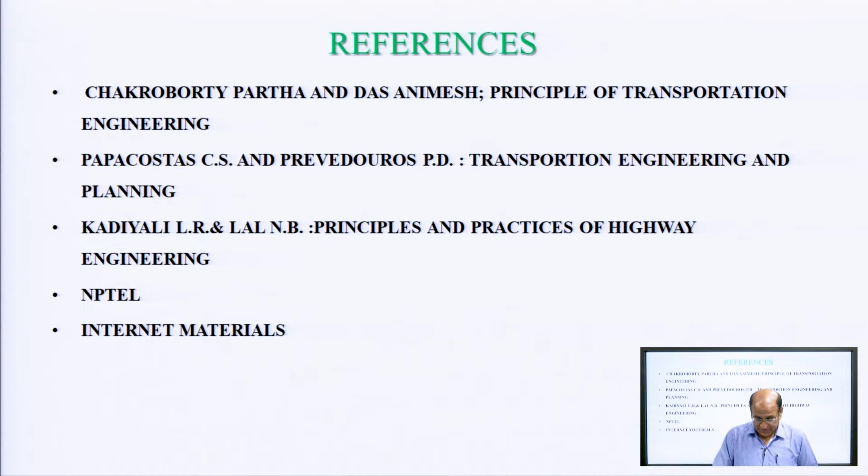The content that we will cover today are urban growth, private vehicles and pollution, land use, urban density, travel pattern, right of way, parking policy, mobility, urban mobility with smart city technology, smart traffic system, future of urban mobility, upgradation of urban mobility, policies and standards, and designs for urban mobility.

So first of all, urban growth. One of the biggest problems of urban transport has been its inability to keep pace with population growth in the city. While urbanization and growth of the city contribute to economic growth of a city, unplanned growth cannot be sustained in the longer term.

A city that is planned from the beginning for more population, infrastructure and public transport is better equipped to tackle growth. All cities will witness economic growth, but an unplanned city will stagnate due to deterioration of quality of life, while the planned city will continue its progress. In India, many cities fall under the first category, where growth is haphazard because of ad hoc policies.

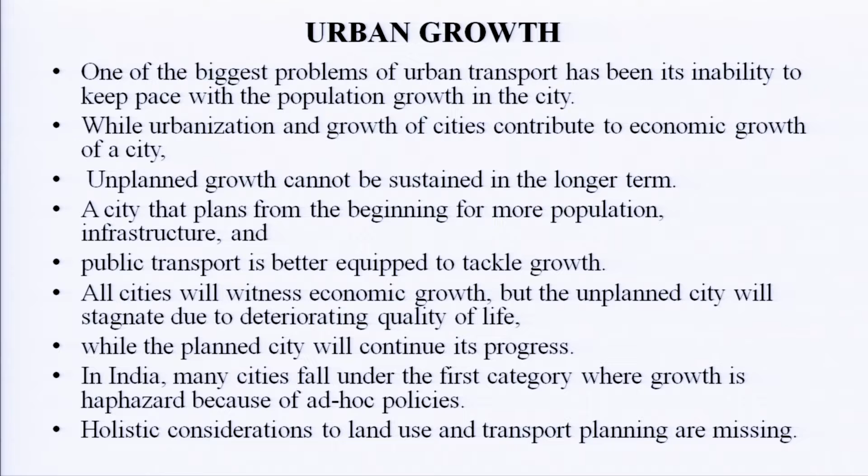Holistic consideration to land use and transport planning are missing. Private vehicles and pollution is a big problem for our country. More and more people opt for their own vehicle. The rise in income level, easy availability of loans and the status afforded by owning a vehicle has led to tremendous growth in private vehicles.

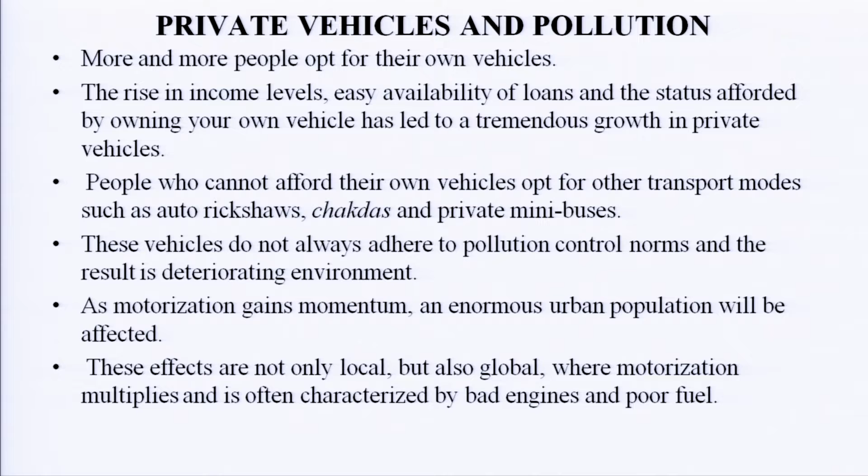People who cannot afford their own vehicles opt for other transport modes such as rickshaw, chakdas and private minibus, etc. These vehicles do not always adhere to pollution control norms and result in deteriorating environment. As motorization gains momentum, an enormous urban population will be affected. These effects are not only local, but also global, where the motorization multiplies and is often characterized by bad engines and poor fuel.

Pollution associated with transportation is not only from the growth in the number of vehicles, but also from urban sprawl. Dirty fuel, poor traffic management and high proportion of smoke-belching vehicles such as old and ill-maintained buses, auto rickshaw and two-stroke motorcycles.

In India, development plans and transport plans are taken up as independent exercises. The transportation plan depends more on data than strategy, and tends to accept the development plan as sacrosanct. Generally, they do not make recommendations on improving the development plan and are undertaken as a study meant to reinforce and promote pre-conceived ideas like road widening, grade separator, LRT and metro.

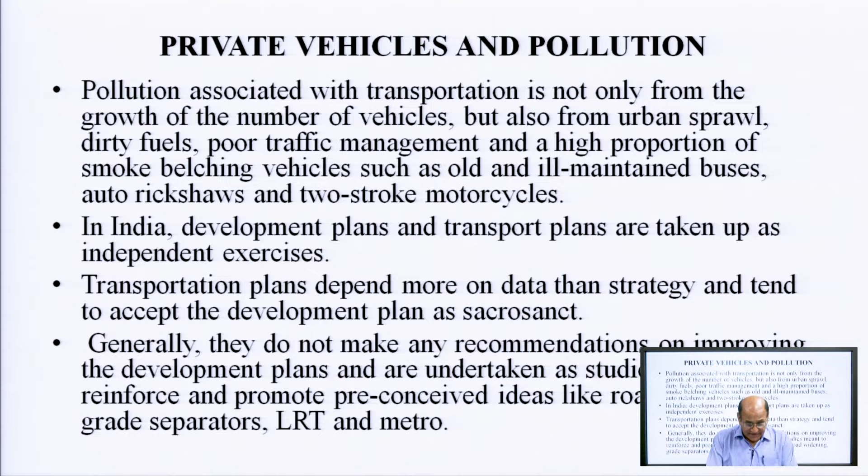Land use is a very important aspect of urban transportation system. We will discuss it separately also, but here we will cover it slightly. In urban transportation system, there is a fundamental relationship between land use, demography and transportation. Where people live and work, go to school or shop, decides the exchange of trips between different areas and roads. Socio-economic, cultural and demographic factors like employment and family income influence the number of trips and how they are made.

The urban transport system affects the accessibility of land and its value, and therefore urban transport is a tool to shape urban development and urban form. Ideally, land use planning and transportation planning should go hand in hand. When this is not done, fundamental flaws are built into the city's structure.

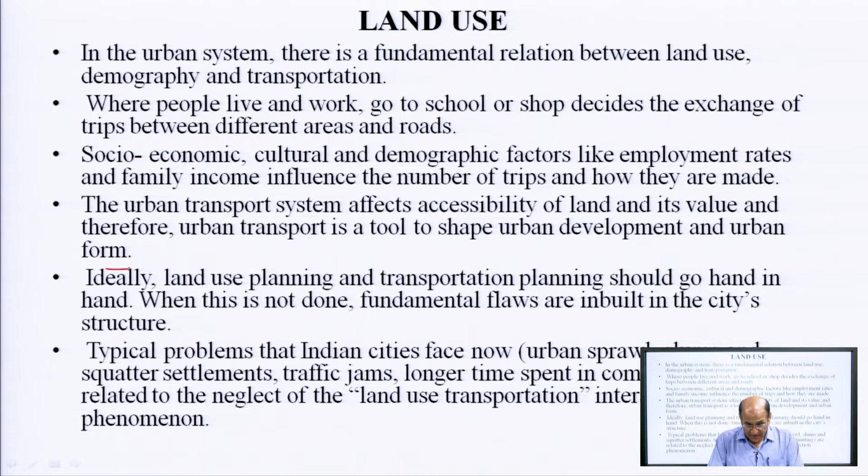Typical problems that Indian cities face now: urban sprawl, slums and squatter settlements, traffic jams, longer time spent in commuting, are related to the neglect of the land use transportation interaction phenomena.

Most cities that do well with regard to transportation and land use planning tend to be otherwise well managed, which includes being fiscally and financially sound. Cities that neglect this reality face fiscal and financial difficulties, and generally bear heavy environmental cost, and also the issue of social equity in transportation remains unaddressed.

The disciplines of urban transport, urban geography, urban economy, city planning and environmental study have long recognized the land use impact of transportation decisions. For example, when the planner considers widening of a road or raising the minimum parking standard, they are generally focused on direct financial cost and give little consideration to factors such as social and environmental impact of increased pavement.

Yet these land use impacts can be comparable in magnitude to other costs and benefits that are normally considered in transportation decision making.

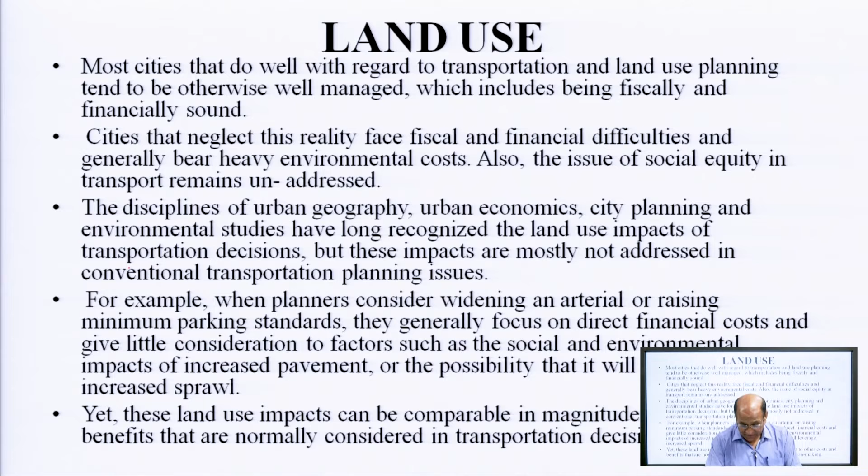Now, with the city having such scattered land use, density gets affected. The ideal city form we are looking for is higher density at the core, at nodes, and along the transport corridor - nodes, core and corridor.

With density gradually receding away from the center or the node and away from the corridor, these dense city cores, nodes and corridors may be in the form of a central business district with the land use mix that is appropriate for local context.

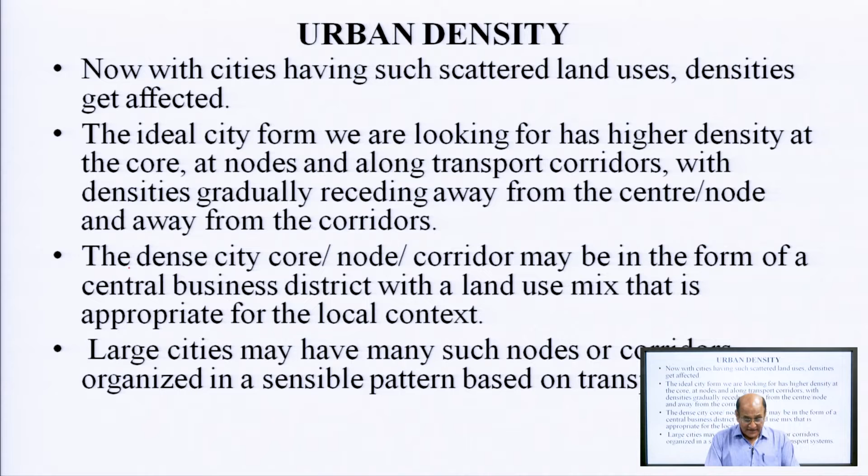Large cities may have many such nodes or corridors organized in a sensible pattern based on the transportation system.

Now come to the travel pattern. Uncoordinated land use and density pattern always result in a skewed travel pattern. In such a scenario, it is not unusual to find office buildings scattered over the city, mixed with other land use.

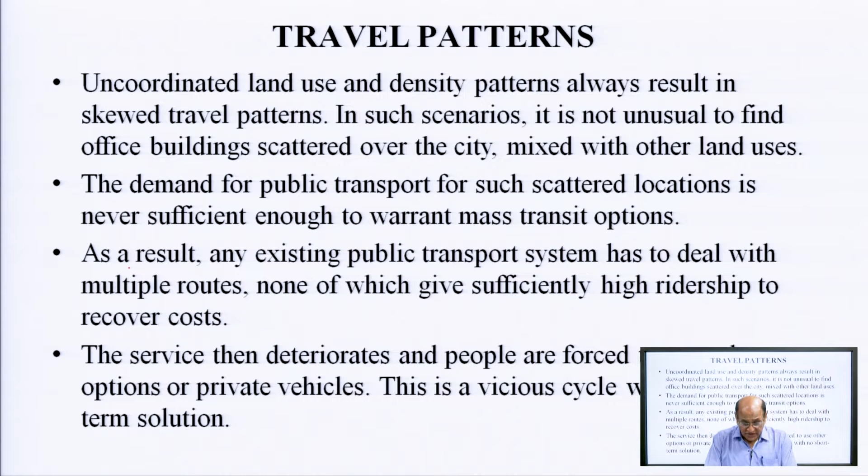The demand for public transport for such a scattered location is never sufficient enough to warrant a mass transit option. As a result, any existing public transport system has to deal with multiple routes, none of which give sufficiently high ridership to recover cost. The service deteriorates and people are forced to use other modes of option or private vehicles. This is the vicious cycle with no short term solution.

Road patterns are important. They constitute almost 20% of the city land area and are the most important public open space for the city.

Roads define the city structure and influence its spatial growth, determine infrastructure network, and influence the efficiency and productivity of all sections of society. Planning and design of a road network is necessary for ensuring a smooth and efficient flow of traffic.

Safety of the road user, lowering of air and noise pollution, facilitating efficient planning of infrastructure network, increasing the efficiency of the labor market, supporting efficient and economical public transportation system, facilitating more efficient economic construction and maintenance of a street.

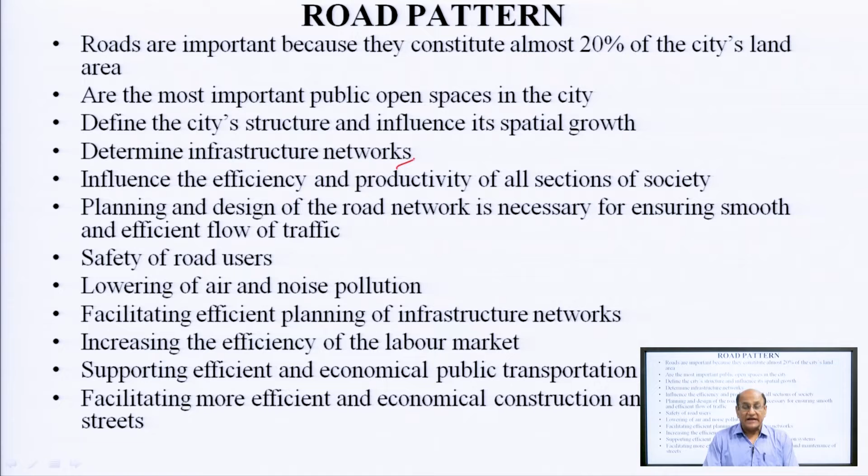Right of way. Another common problem in Indian cities is underutilization of right of way, ROW. A ROW is the width of road including footpath, pedestrian services, cycle track, infrastructure and traffic lanes.

Essentially, it is the width of the road from the property boundary on one side to the property boundary on the other side. In India, our concept of road is the tarred portion of the road.

What remains between the asphalt and the property boundary is free-for-all zone, encroached upon by myriad activities like parking, bus stops and hawkers. As a result, pedestrians are forced to walk on the tarred portion, leading to high probability of accidents.

Since ROW is not organized as per requirement of the transport and non-transport function, most Indian streets are characterized by chaotic and unsafe situations for all users. It appears that roads are treated as a leftover space between the buildings.

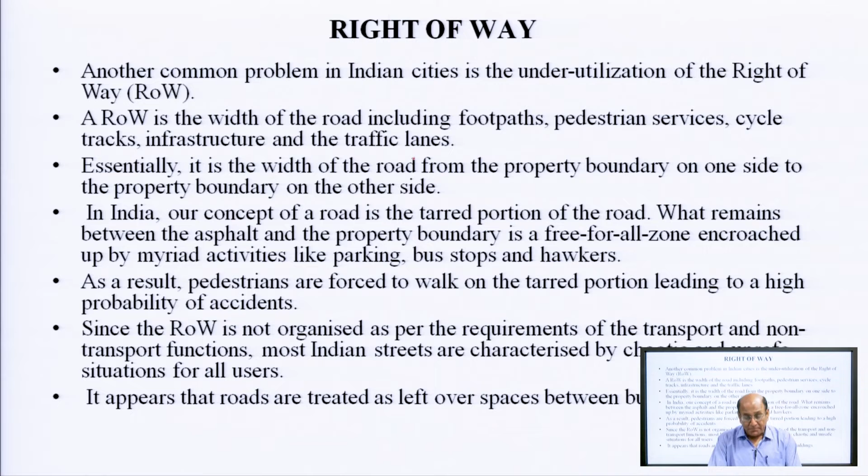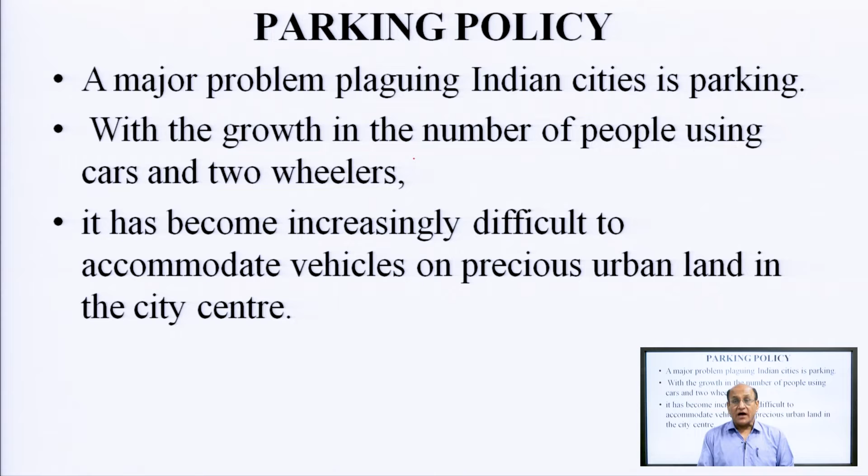Parking policy. A major problem plaguing Indian cities is parking. With the growth in the number of people using cars and two-wheelers, it has become increasingly difficult to accommodate vehicles on the precious urban land in the city center.

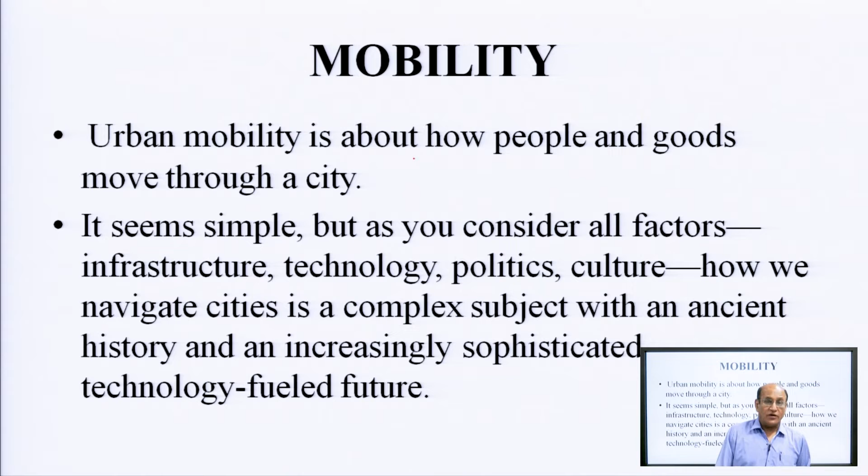Now come to mobility. Urban mobility is about how people and goods move through a city. It seems simple, but as you consider all the factors, infrastructure, technology, politics, culture, how we navigate cities is a complex subject with an ancient history and an increasingly sophisticated technology fueled future.

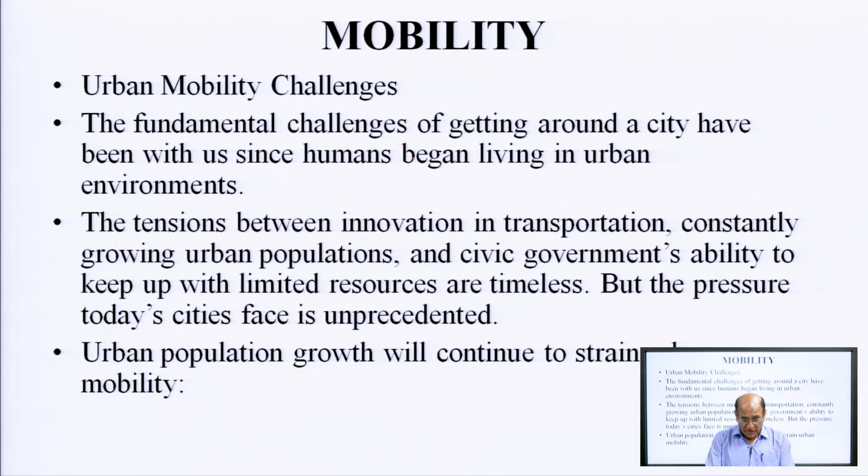Urban mobility challenges. The fundamental challenges of getting around a city have been with us since humans began living in urban environments. The tension between innovation in transportation, constantly growing urban population, and the civic government's ability to keep up with limited resources is timeless, but the pressure today's cities face is unprecedented. Urban population growth will continue to strain urban mobility.

Now come to another factor which affects mobility, that is congestion. Time spent sitting in traffic is a major drain for individual commuters and the overall productivity of world cities. Congested roadways do more than waste time.

Public safety. Traffic accidents kill 1.35 million people around the world each year, and leave between 20 and 50 million people with non-fatal injuries. More than half of all road traffic deaths and injuries involve pedestrians, cyclists, motorcyclists and passengers.

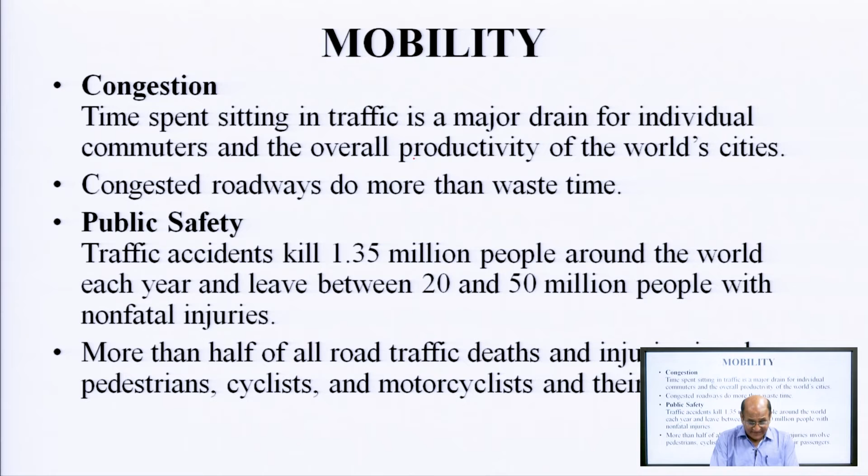Second is public health. Congested stop and go traffic increases the volume of microscopic particulates in vehicle exhaust. According to the World Health Organization, exhaust particulates are capable of penetrating deep into the lung passageway and entering the bloodstream, causing cardiovascular, cerebrovascular, and respiratory impact.

Next is environmental impact. Cities everywhere are concerned about environmental sustainability, and transportation is a major contributing factor. As estimated, 22% of the global carbon dioxide CO2 emissions are attributed to the transportation sector, which will rise as cities grow and individual citizens adopt carbon burning transportation.

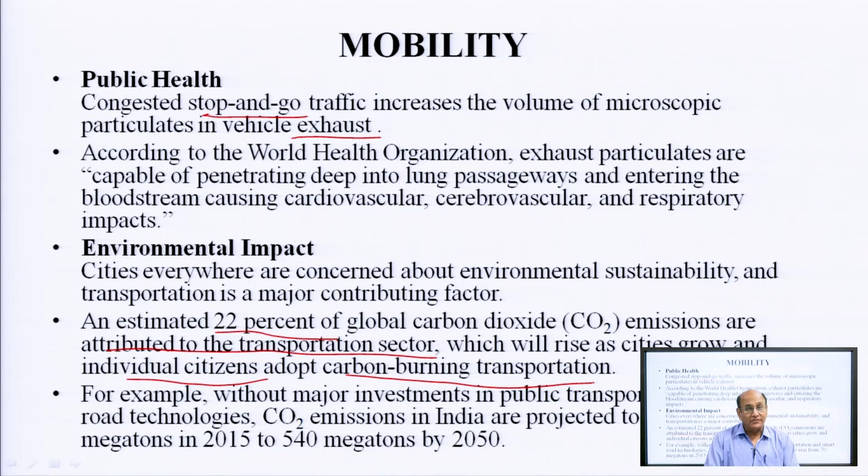For example, without major investment in public transportation and smart road technology, CO2 emissions in India are projected to rise from 70 megaton in 2015 to 540 megaton in 2050. So this is the big impact on environment due to transportation.

Urban mobility with smart city technology. Meeting urban mobility challenges today, the smart city technology. Cities are improving mobility, saving energy and reducing pollution today with smart city IoT technologies. A smart city takes in data from every available input, traffic signals, cameras, embedded devices on public transit, then analyzes the data with AI and shares it through open data pools.

This creates a constant awareness to conditions that can be used for traffic management, route planning, public safety and emergency response.

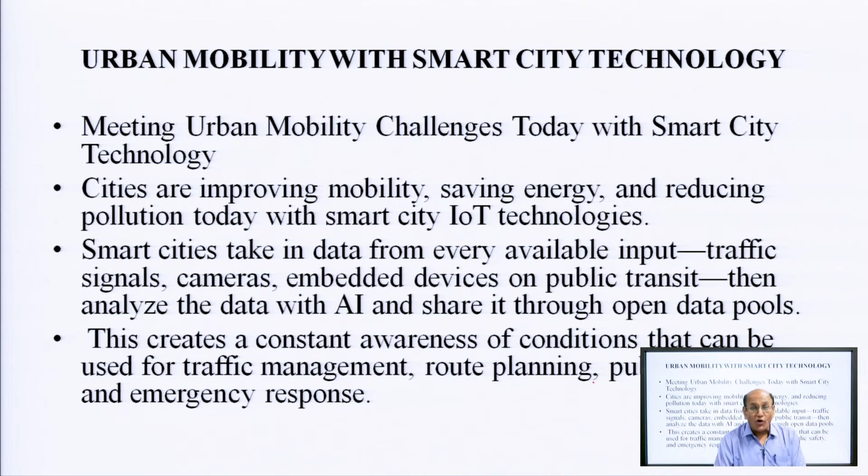Urban mobility with smart city technology, we will discuss one by one. A smart pavement can monitor weather, road condition and even road wear and share the information with the driver and traffic controllers. A smart parking can alert drivers to available spaces, reducing time spent circling and searching for a spot. A smart traffic signal can respond to traffic conditions and retime themselves to relieve congestion.

A smart street light with a camera, microphone and sensor can dim themselves when no one is around and gather intelligence on traffic, public safety and air quality. A smart camera can keep an eye on traffic and public safety.

A smart intersection can optimize vehicle and pedestrian traffic, detect risk and warn against imminent accidents, reducing crashes and injuries. A smart tolling can assess toll on free flowing traffic, support specific road congestion pricing or per mile tolls, and collect fees electronically. We are doing this in UP also.

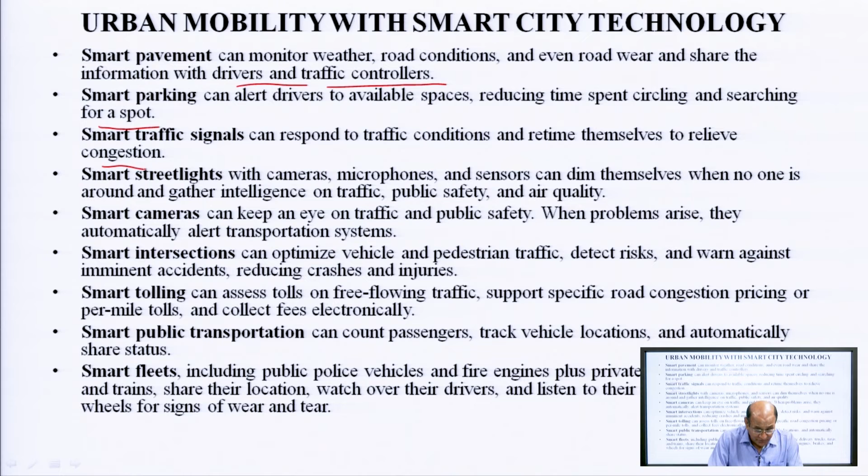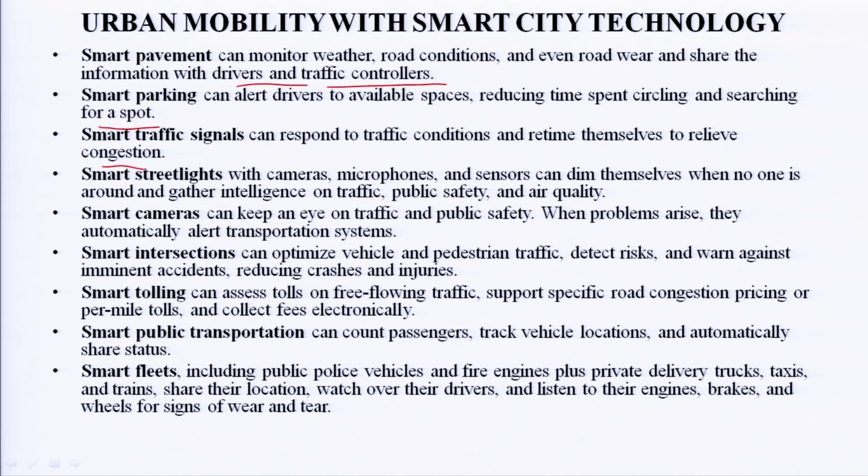A smart public transportation can count passengers, track vehicle location, automatically share the status. A smart fleet, including public police vehicles and fire engines plus private delivery trucks, taxis and trains, share their location, watch over the driver, and listen to the engine, brake and wheel for signs of wear and tear.

So in UP we are using a FASTag for this purpose, and the government is now going to implement it mandatorily. Now, a smart traffic system can save commuters up to 60 hours a year.

Together, these intelligent sensors, microphones and cameras can power a model of what's happening in a city's streets, highways and rail lines in near real time. With the help of artificial intelligence, this awareness can transform passive traffic management into an active intelligent transportation system. This system can anticipate congestion, automatically reroute traffic, retime lights and apply dynamic tolling to help keep the city moving.

The city of Bangkok, Thailand has saved over 51,000 commuter hours in a year.

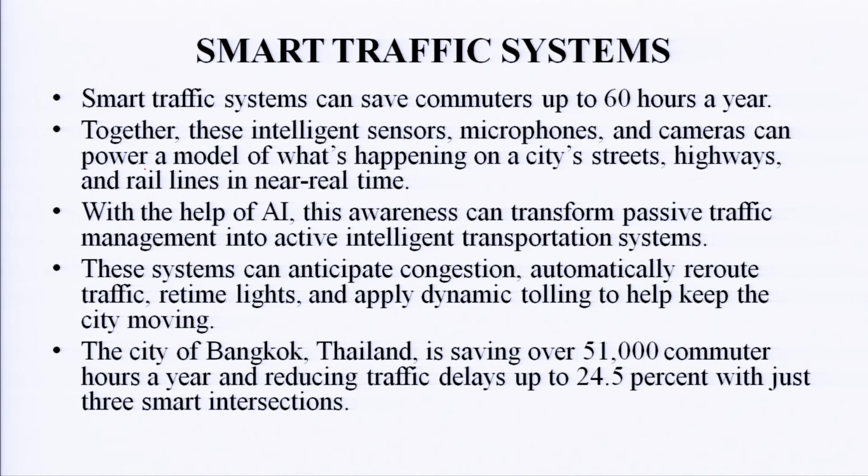Future of urban mobility: multiple technologies are coming online that will fundamentally change how people and goods move through the city.

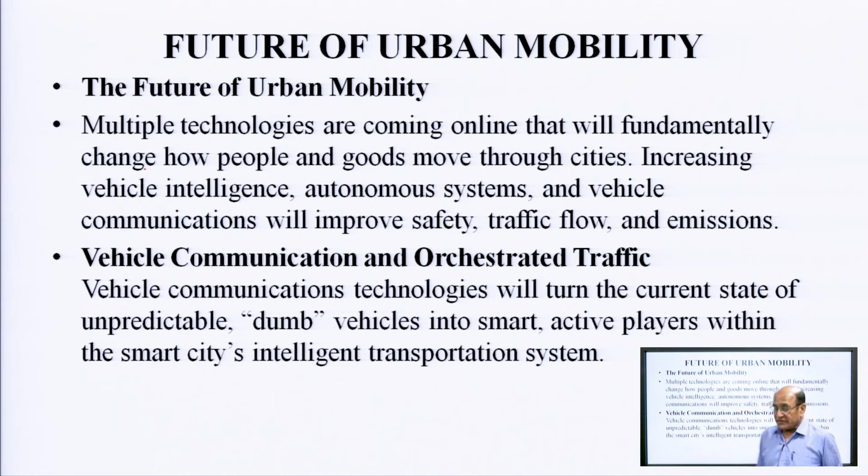Vehicle communication technology will turn the current state of unpredictable, dumb vehicles into smart active players within the smart city intelligent transportation system.

Future urban mobility: vehicle communication between individual smart vehicles and from the smart vehicle to the central traffic management system will help traffic flow as an intelligent unified whole that maintains consistent speed and safe vehicle distances throughout, and fuel efficiency will increase dramatically as accidents drop and pollution decreases.

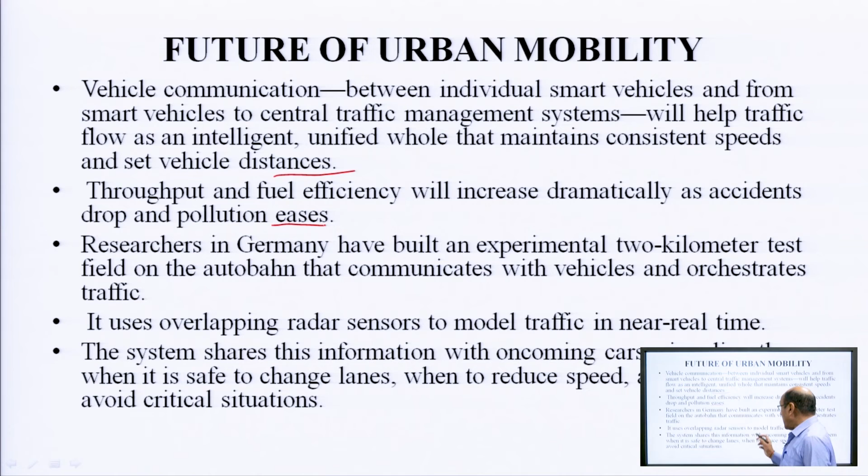Researchers in Germany have done a lot of work in this area. It uses overlapping radar sensors to model traffic in near real time. The system shares this information with oncoming cars.

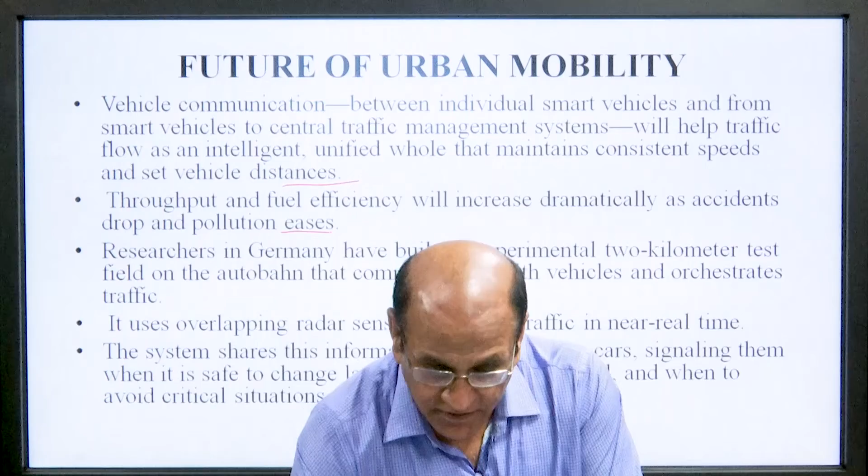Future urban mobility uses overlapping radar sensors to model traffic in near real time.

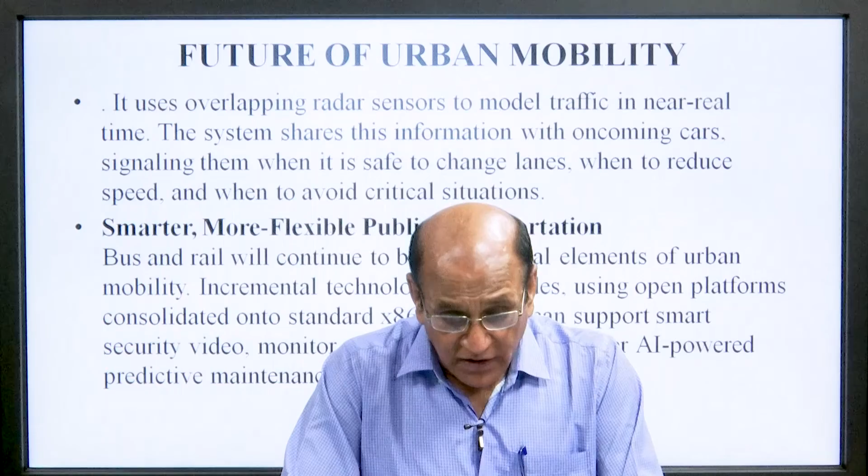A smarter, more flexible public transportation, bus and rail will continue to be fundamental elements of urban mobility, with incremental technology upgrades using open platforms consolidated onto standard x86 hardware.

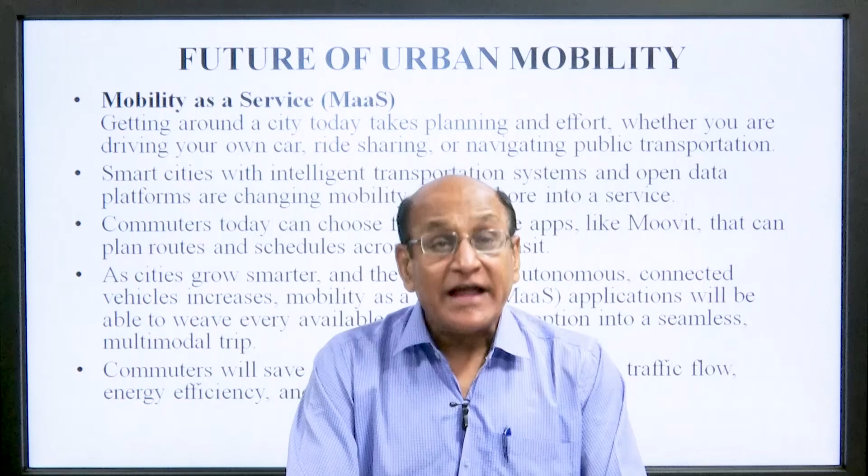Mobility as a Service, or MaaS. Getting around a city today takes planning and effort, whether you are driving your own car, ride sharing, or navigating public transportation. Smart cities with intelligent transportation systems and open data platforms are changing mobility from a chore into a service.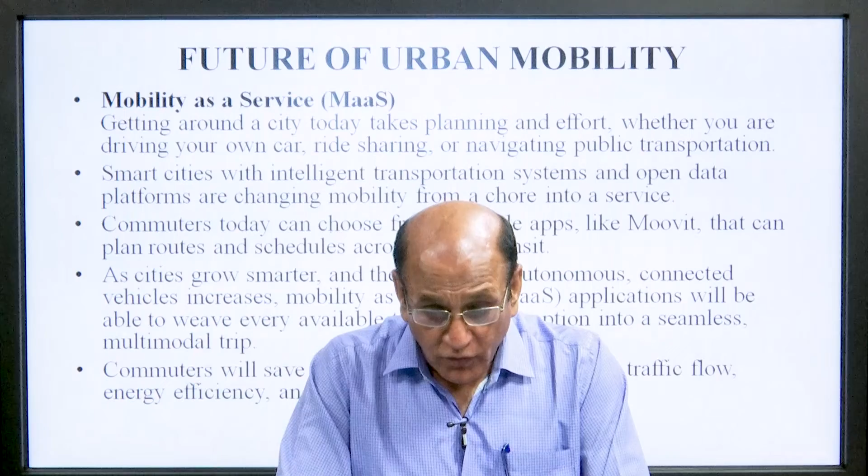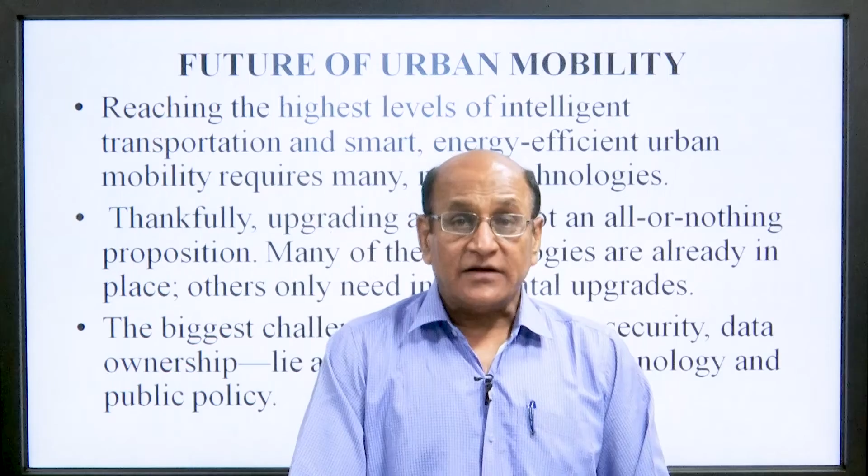Reaching the highest level of intelligent transportation and smart energy efficient urban mobility requires many technologies. Upgrading a city is not an all or nothing proposition. Many technologies are already in place, others only need incremental upgrades.

The biggest challenges, privacy, data security, data ownership, lie in the intersection of technology and public policies.

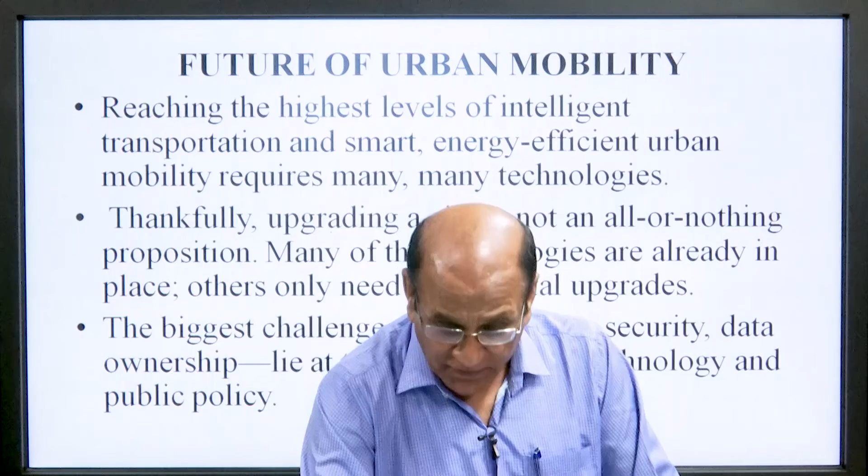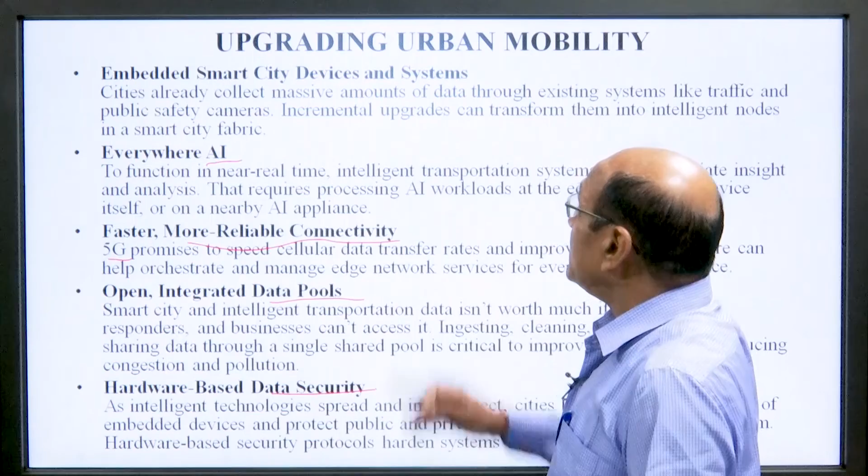Upgrading urban mobility: embedding smart city devices and systems everywhere with artificial intelligence and faster, more reliable connectivity. This will come with 5G, open and integrated data pools, and hardware based data security. These are the areas where upgrades are needed for the urban transportation system.

Public policies and industry standards are crucial for developing smart city technology for urban mobility and for deploying the IoT technology that makes them possible.

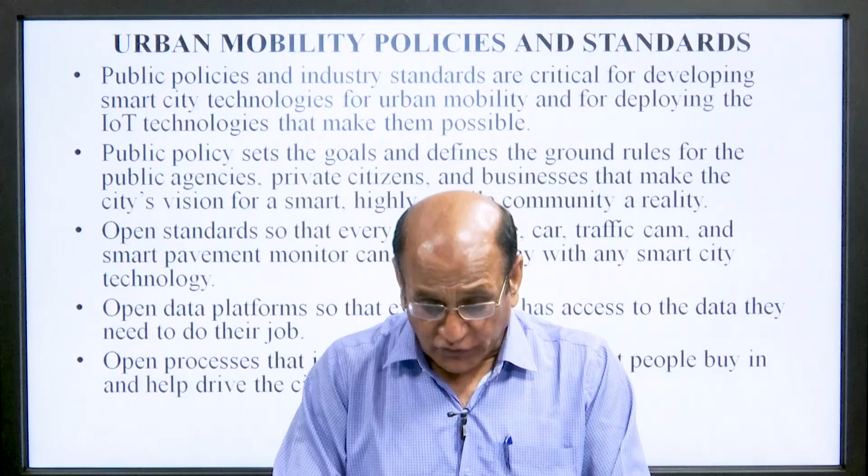Open data platforms, so every player has access to the data they need to do their job. Open processes that include all stakeholders, so that people buy in and help drive the city's technological vision.

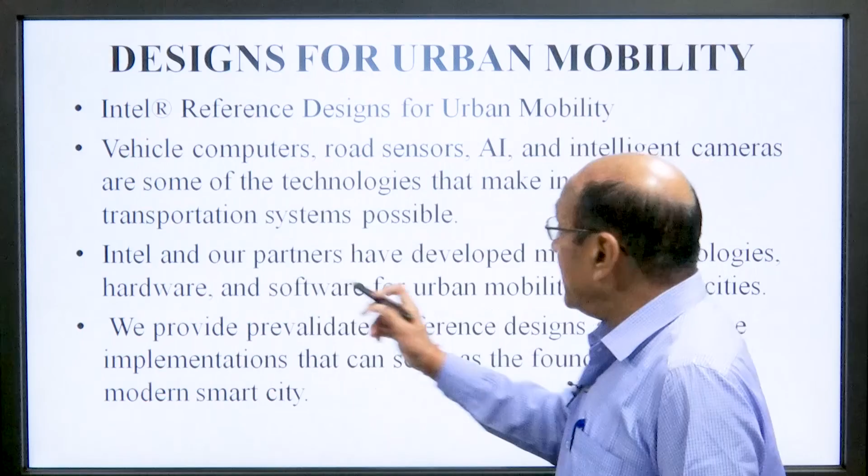Design for urban mobility: these are based on Intel's reference design for urban mobility. Vehicle computer, road sensor, artificial intelligence and intelligent camera are some of the technologies that make intelligent transportation systems possible.

We provide pre-validated reference designs and reference implementations that can serve as the foundation for a modern smart city.

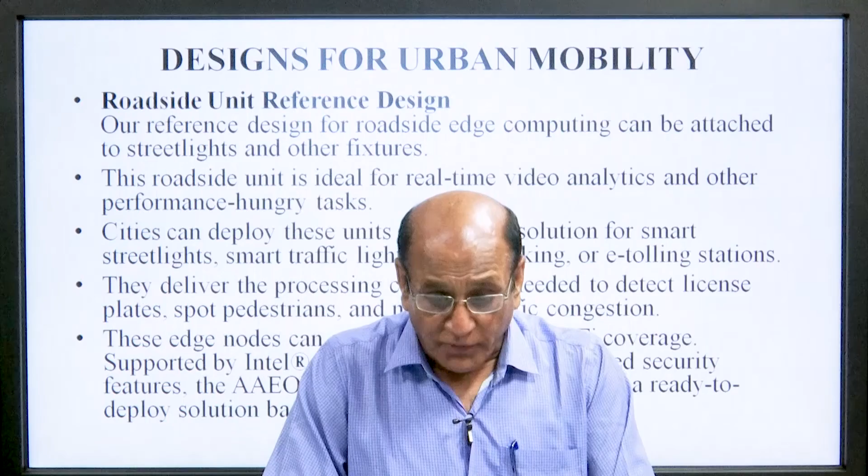Roadside unit reference design: our reference design of roadside edge computing can be attached to a street light and other fixtures.

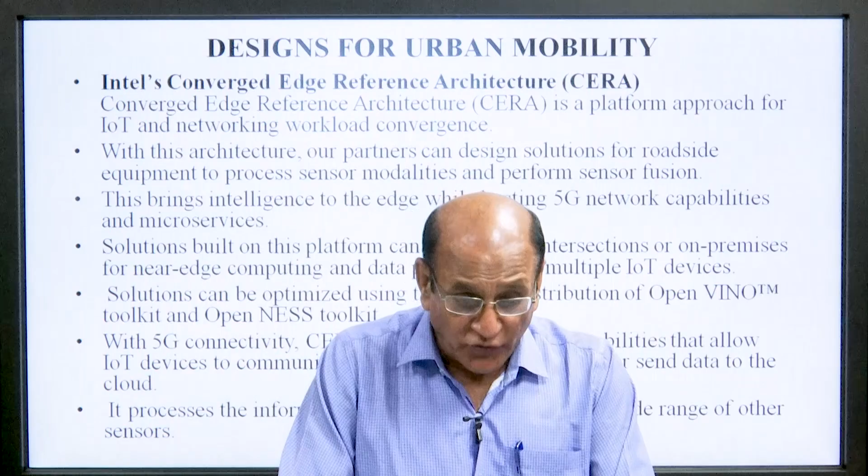Intel's Converged Edge Reference Architecture, CERA, is a platform approach to IoT and network workload convergence.